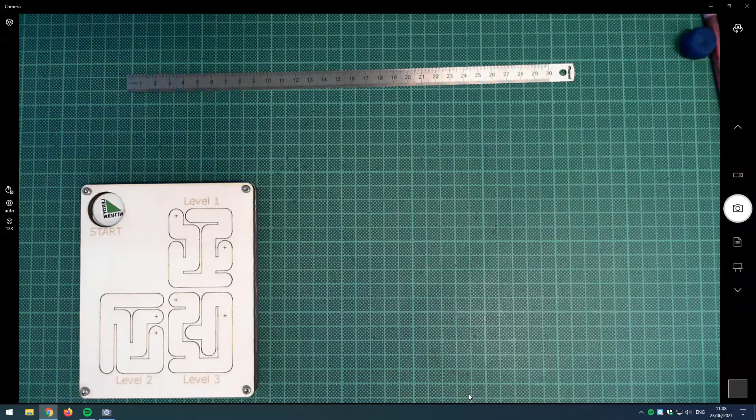So I'm looking at making a coin maze in this video, next series of videos. Who knows how far this is going to go? But this coin maze, I've seen these before.

This is actually taken from a tutorial on the techsoft.co.uk website, which is a UK laser cutting company. And they make theirs in clear acrylic, so you can see where the coin is.

I saw that and thought to myself, well, that's not very sustainable. Can I make it from card? But of course, if you make it from card, you can't see where the coin is, which makes it very difficult to navigate through the maze.

So what I've done here is put in a trace or engraving of the maze in each case. For this particular puzzle, there's 1, 2, 3 layers of maze happening here with some thin cards separating each layer. I'll look at that later when putting this all together with the updated model. Then there's a piece of 3mm modeling card on the front and back just to hold it all together.

I did think about replacing this modeling card with thin card for even more sustainability, but I feel it wouldn't be rigid enough. I've also realized with this - well, let me just show you how it works first of all.

I've got a euro trolley coin here. I'm going to put it in, and this represents level 1. I'm not going to go all the way through, just show you some parts of level 1 here.

So here we are. This cross in my example represents the starting point. Notice I want to get to this cross, which then goes to level 2, to this point here. I have to navigate around through that maze to this point, which then goes to level 3. Then I have to navigate my way out to the exit, which is on the other side, this same top corner. Okay, anyway, we're back to level 1.

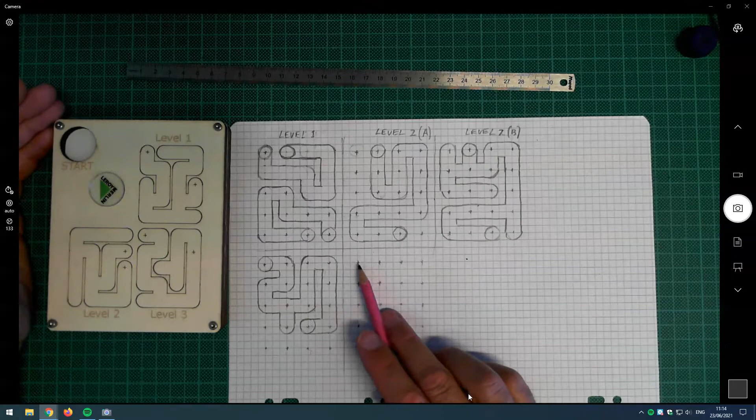And you might want to space things out a little bit more. I was just trying to make sure that I wasn't using up too much material. Now, the reason why I've gone here with this number of channels, i.e. I've basically got space here for 4 vertical channels and 5 horizontal channels, is I'm thinking about sustainability of the material. If I do it like this, effectively on a sheet of A4 paper, I can have 1, 2 laser cut onto one height of A4. Now, this card is actually in bigger sheets, but it means that I can fit it in there with minimum waste material. So that's my logic behind working with this number of channels.

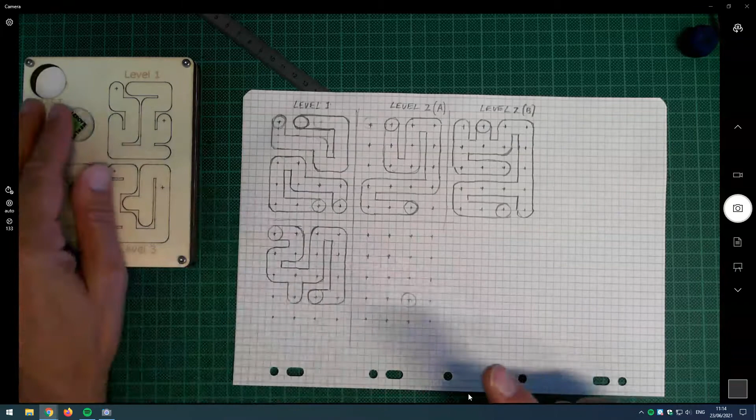I've also done some research into how big the coins need to be. So let's have a quick look at that. What I've got here are Swiss franc diameters, and I can see here that 1 franc is 23.2. I could also work with half franc. I think you can also work with 20 centimes as well. And if I do a search here for euro coin diameter, that's coming in at 23.25. So 23.2 and 23.25, they're very, very close. That means, of course, that this coin here is going to be 23.25.

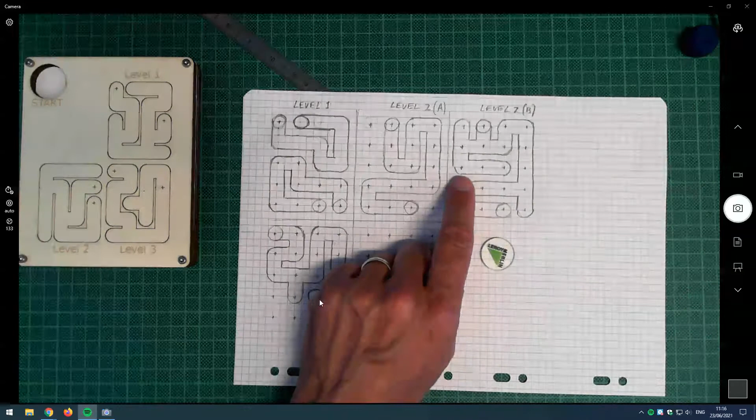So when I'm making the slots, the runs in here, I'm actually setting them to 24 millimeters in diameter, and you'll see that in a second in techsoft design. So let's just pause this for a second.

So here we are in techsoft design, and first thing I'm going to do here is right click on the grid lock, and I'm going to, as usual, put in my 5 millimeter pale blue lined grid. Okay, and I'm wanting to have these slots to be 24 millimeters in diameter, because I know that my coins are about 23.2 or 23.25.

So I'm going to hold the mouse button down here on the draw tool and go, circle tool should I say, and draw a circle with a given center and radius. I want to put this to 12 millimeters, which is going to, of course, give me a diameter of 24. So that's going to be bigger than I want it to be. And let's just start in the top left corner here, and let's just draw a circle. In fact, no, let's come down to the bottom left. Let's draw it about there, just suitably in from the side there, so I've got a little bit of working space.

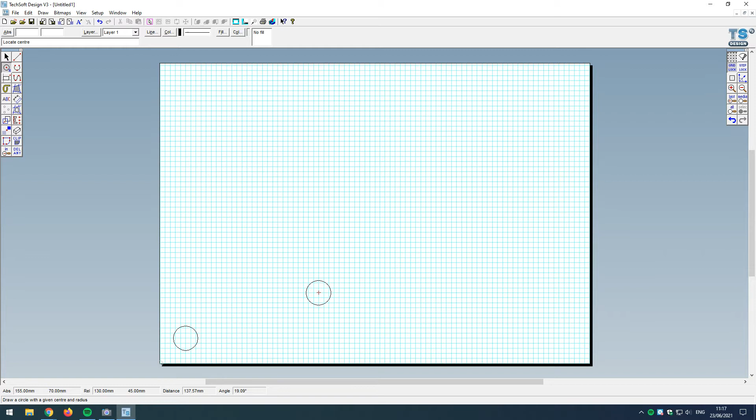Okay, so what I want to do effectively is have a bunch of circles all mapped out. And I can see that if I stay on the grid here, the wall separating these channels is minuscule. It's going to effectively be 1 millimeter. And I think that's going to be too little. I want to have a little bit more. But if I come to a 5 millimeter, snap to the next 5 millimeter grid line, then effectively that's ending up being 6 millimeters. In fact, I can just confirm that now.

If I just get a dimension line tool, come on to step lock, which is currently set to 1 millimeter, then that is coming in there, and that is giving me... sorry, excuse me. Okay.

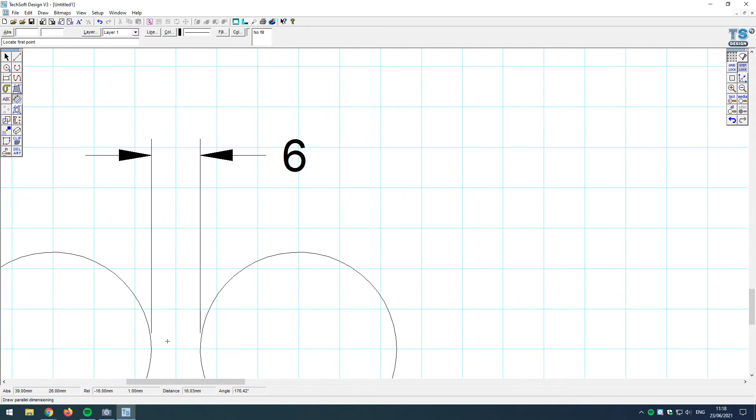So that's probably too much. What I'm going to do here is come back onto step lock settings, and I'm going to go for a step spacing of 2.5, which is half of 5. It's just giving me a bit finer resolution. Let's get rid of that circle and that dimension line.

I'm going to come back to my 24 millimeter diameter circles, and now notice I felt that was too narrow, but now I can see the center point of this circle is the midpoint of the grid. If I click there, let's see how I can define the distance between these 2 points. Let's just draw a line in there. Let's come to the delete path tool.

Let's delete the part in the middle. Let's now get the dimension line, turn off step lock and grid lock, turn on the attach tool, and now I can snap onto that endpoint, snap onto that endpoint, and that gives me a dimension of 3.5 millimeters precisely. So the key thing here is, I am really designing with intent.

I want a sufficiently wide channel, or sufficiently wide wall, separating the channels that the coins pass down, but not so wide that I'm using excessive material. Okay, let's just undo those steps.

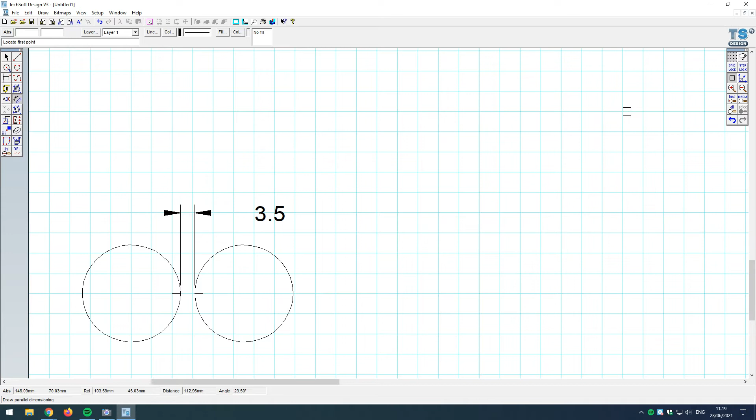Don't want those lines in there. Let's make sure attach tool is off. Let's make sure that step lock is back on again. And now I can keep drawing in some circles, and I can see here that's going to be on the grid, and this one is going to be slightly off the grid.

Now, at this point, there's lots of things I could do here. I could take these, copy them, and paste them above. I'm going to have a look at another thing we can do here.

I'm going to come to the dimension line tool for a second here. I'm just going to confirm the distance between the midpoint of those two first circles. That's going to be 27.5 millimeters.

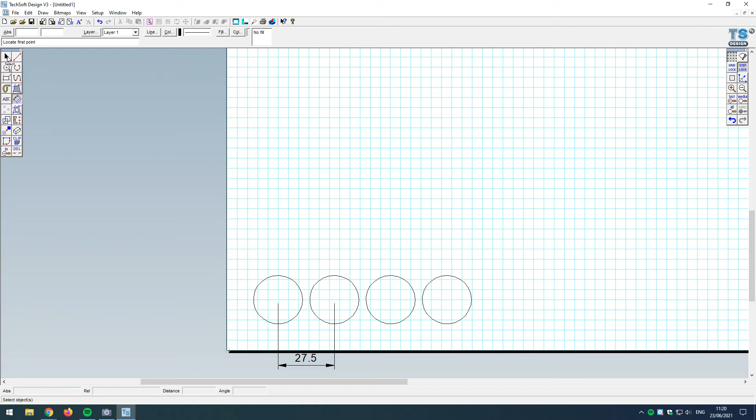So I know that I want another 4 rows of these to create the vertical columns. Knowing that they're 27.5 millimeters across, I'm going to select those 4. I'm going to come to the transformation tool, and I'm going to come to a rectangular array.

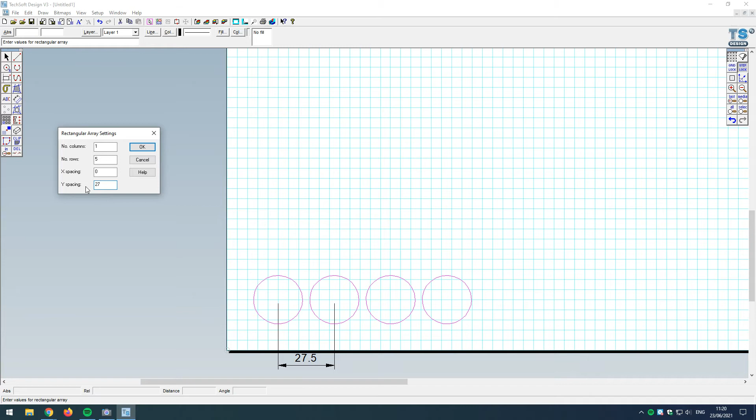Now I want here no more columns. Well, I've already got my 4 columns, so I'm going to put that down to just 1 column of those 4, if that makes sense. Number of rows, though, I want 5 rows in total. The X spacing is going to be 0 because I don't want anything spaced out in the X axis, but my Y spacing vertically up the grid is going to be the same as the spacing of the circles, which is 27.5 millimeters.

I click on OK, and I instantly get the remaining circles. So that's a really interesting tool there. As I say, I could have just copied and pasted, but it's another thing we can use.

Let's just double check again the dimensions separating these. I'm just going to double check the dimensions separating those there, for example, and that also is going to be 27.5. So here again, I am working with intent. There's nothing random about this design. Every decision I'm making is a design decision with intent.

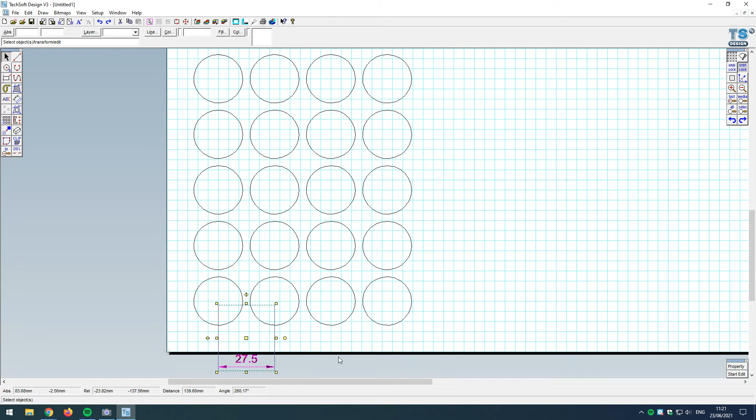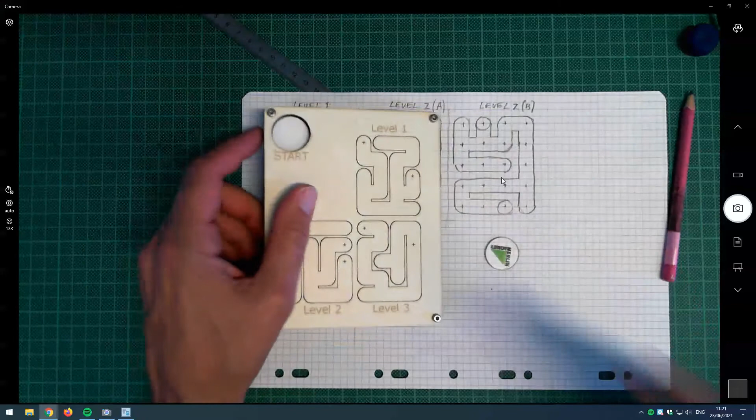Okay, let's get rid of those dimension lines there. This is looking really good. Something I also want to have in this design is the fact that it's got some holes for bolts to go through. They are M3 bolts. And I've also got a wall to this, and I've just filleted the corners on here as well. Let's have a quick look at how I'm going to do that.

Okay, so first of all, I'm going to put in those M3 bolts. I'm going to come back to the circle with a given center and radius.

M3 bolts have a diameter of 3 millimeters, which would be a radius of 1.5, but I'm going to put the radius in here as 1.6, which gives me a diameter of 3.2. So it's 0.2 millimeters slightly oversized, but that's because I want to have a little bit of tolerance here.

If I have it exactly 3 millimeters, then the bolt will go through one layer of card. Will it go through multiple layers of card? If they're slightly misaligned, or if there's a little bit of card that hasn't been thoroughly cut properly, I want to provide a little bit of tolerance there to make sure this bolt passes through nice and smoothly. So that's my thinking - it's a design intent that I'm applying here.

Let's click OK there. I'm thinking here that this bolt - let's see, because I've got my step lock on, and my step lock is with a 2.5 millimeter grid spacing, which is half of the major grid here. I can see I can snap onto the blue lines. I can also snap onto these midpoints as well, and I actually rather like the look of that. I think that's going to be rather nice.

Let's put one there. Notice here that because the edge of the circle is kind of the midpoint of the square, I'm going to line it up like this. But over here, I'm actually going to be on the line because of the way this has been spaced out. Another way to approach this is if I come to the radial lock tool, I'm going to right click on radial lock.

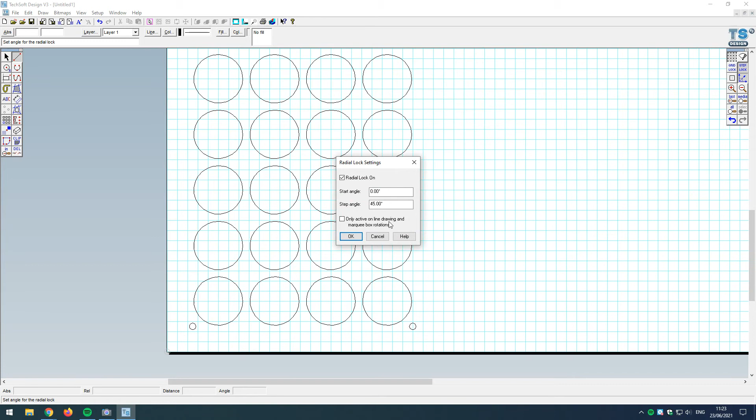I'm going to only activate this when line drawing with a 45-degree step angle. Just check this out - I can draw a line here. Now I've got radial lock turned on. When I'm drawing, it's either going to be horizontal, vertical, or at 45 degrees. And notice how that line is 45 degrees from this circle.

I can do exactly the same over here. Okay, and now if I come up to the top here and just click on this, I get the same idea. Now, of course, I don't have to do this - I'm just showing you that everything I'm doing here has intent.

So those are my holes in place, and now I'm going to think about having the external wall that defines the cutout for this box. Let's go to our rectangular tool here, and now my thinking is, how close to the circles, and particularly the bolts, do I want this edge to be? I feel as if my edge here is too close.

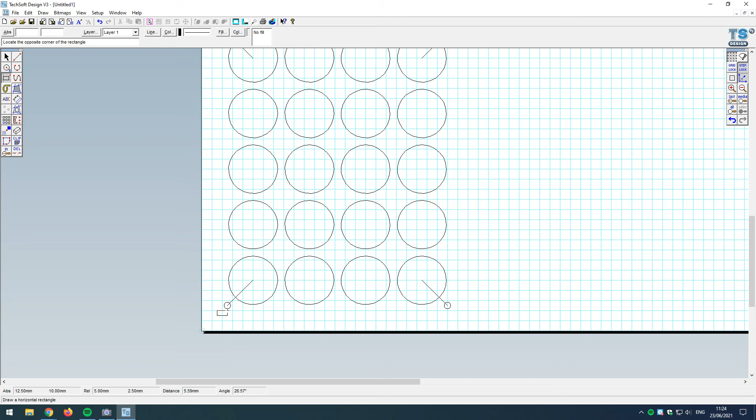So I'm going to right click there, and instead click here. That gives me 2.5 millimeters plus, let's see, that was 3.2 millimeters, so that's going to be roughly an extra 2 millimeters. I think that's going to be enough. Let's bring it up here, let's bring it out to here, and I'm just visually going to inspect that. That looks like it's approximately square all the way around.

Liking that a lot. Last thing that I've got here with my model is, because I've got this idea of kind of round themes, I'm going to fillet the corners. Okay, whoopsie daisy, let's come back to techsoft here.

Let's come to the fillet tool, which is going to be this arcs tool, and the fillet tool is right at the end. I'm going to have here a 5mm radius fillet. The reason for me thinking this is that if I put this on here, it kind of follows the profile of this little bolt here.

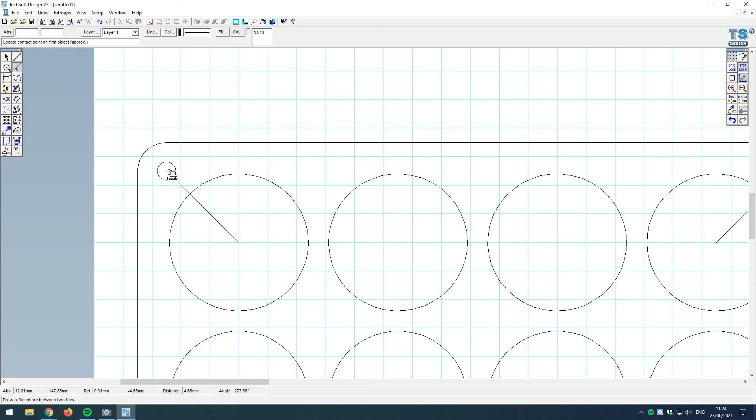You can try different fillet radii, but I feel as if that's nice. In fact, it is - it's literally going to be from there, 2.55. So that just follows the profile of that bolt hole, which I really like. So again, everything here is being done with design intent. Okay, click and click, fantastic.

So that's my basic template in place. I think here what I'm going to do is just delete those lines. And let's see, that is nice.